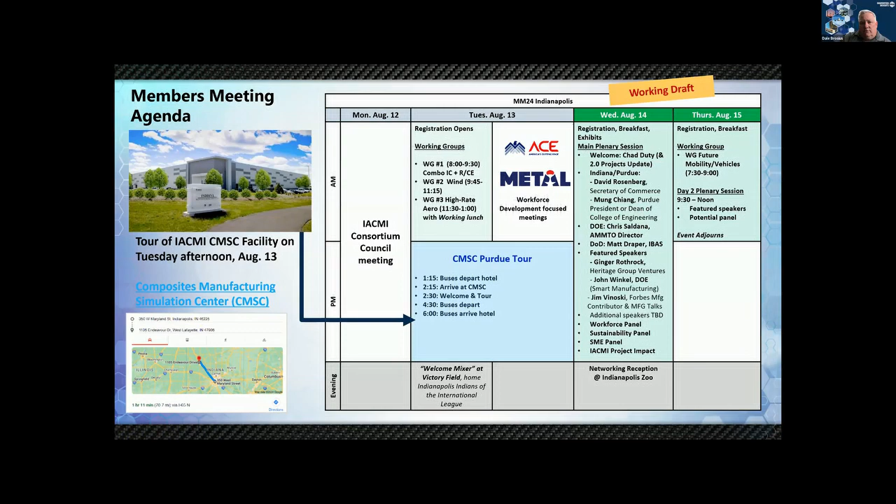On the first evening, Tuesday evening, we're having a welcome mixer at Victory Field, home of the Indianapolis Indians, the AAA farm club of the Pittsburgh Pirates. It's a great stadium, great view, and it's a block or so away from the hotel. If you're coming, you're invited, and you can register on the website for that.

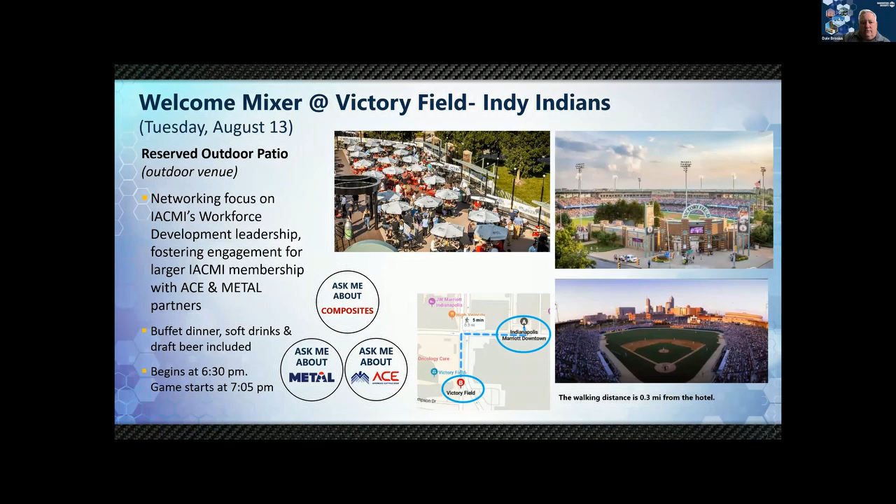And then our big networking reception on Wednesday night is at the Indianapolis Zoo. It's a little bit different venue than we've done before, but I think it'll be quite exciting.

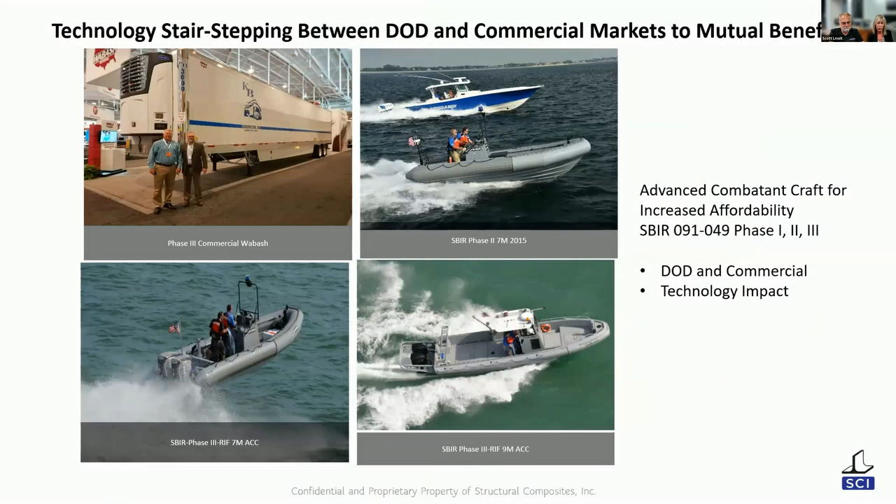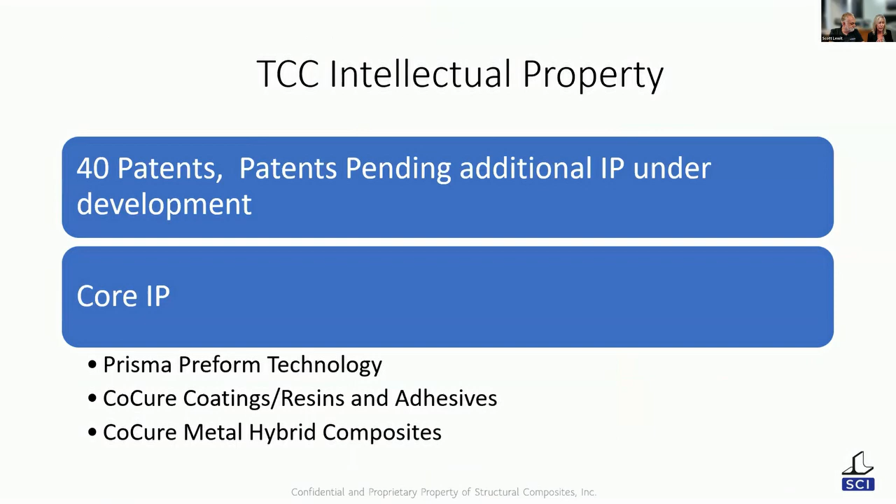If you go to the next slide, other work was done as a spinoff, and we're really going to get into showing the technologies that were discovered with our Prisma Preform technology, our co-cure coatings, and metal hybrid composites. Again, just highlighting that he's got 40 patents in his portfolio, and these are the areas we're going to go into a deep dive on.

Next slide. Scott: Yeah, okay, so one of the things we figured out a long time ago is that depending on the market you're in, a lot of times we're all trying to solve the same problem. What we've been able to successfully do is take technology originally geared to the Navy and morph it into the marine market, as Navy boats. So that's an easy morph.

If we look at transportation, where Wabash lives, it's really low, 3.6%. Why isn't it being used more? Well, the materials don't perform good enough, and they just cost way too much. The other market, infrastructure and building construction, shows a very parallel thing: 4% penetration in the construction market, same kind of performance and price gap.

What's interesting is now let's look at the scale of the markets, and that really tells the story. Material usage back then, 2012, was about $500 million in the marine market in composites. The transportation market at 3.6% is already over five times that size, and the construction market at 4% is like seven times that size.

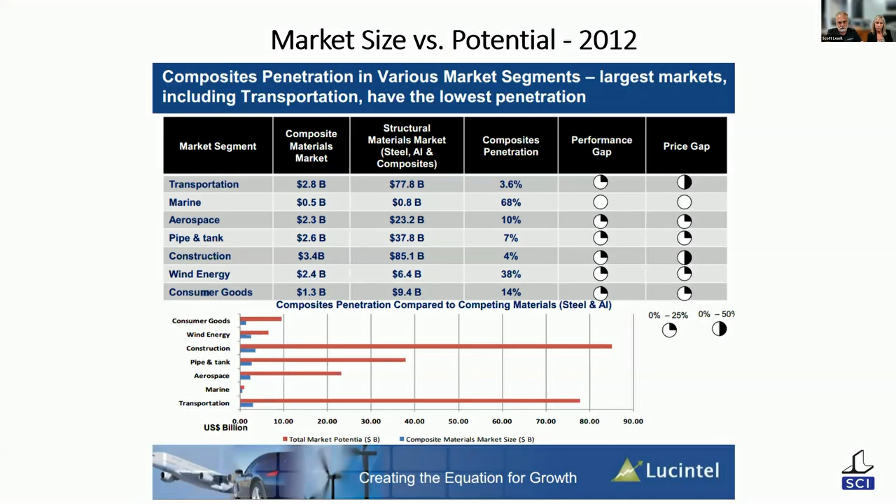That's kind of what our mission is here - to try to make the marine composites better, defense composites better, and simultaneously move these technologies with scale-up partners into other markets. So we use our scale-up partners to really drive our technology to deployment, and we stay focused on developing new technology. The core feeder that Joni talked about is Prisma.

Prisma is a pretty mature technology. We came up with that in the mid-90s, and we're kind of the guys that took the wood out of boats - a very successful product. It's evolving today now that the industry is really transitioning more to infusion processes. We've developed whole new lines of Prisma that have given this a whole new shot in the boating industry.

We estimate we're in about 20% of the recreational boats produced in the US that use some form of Prisma. What we do is take reinforcing fabrics and cast them into shape with expanding foam. So here's your dry preform. They can be custom molded to shape, or they can come out of machines. This is our machine here, it runs at about 16 feet a minute.

Wabash has machines doing Prisma panels for the semi-trailers and everything else, running at similar speeds - pretty fast output, 16 to 30 feet per minute, making these commodity type preforms, which are really centered around e-glass fibers and 2-pound density polyurethane foam. So pretty lightweight materials, relatively low cost in the composites world.

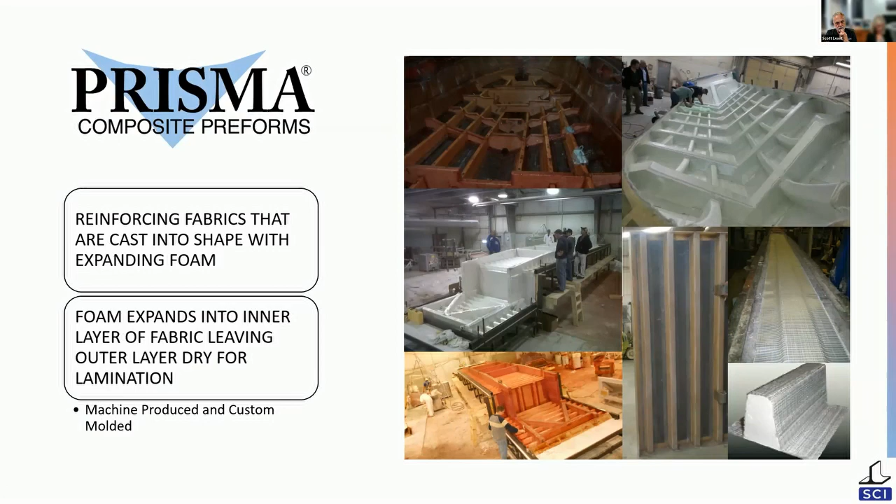By framing everything with this wrapped construction, we can make things that look like sandwiches, but they're not inside. They can perform better than sandwich constructions at a far lower cost. Because if you look at composites, it's cores that are the most expensive element, and if you can't tackle the core cost, you're going to have a tough time getting into these emerging markets. After the core, next comes the resin as your next cost item.

So we were able to take our technology - we had done some work in the RV market early on, which really helped. Our work in the bridge market, research work, helped too. So when Wabash came over here and started looking for their next technology, they could see the boats, but then they could see these other highly loaded structures, and they took the leap of faith, as you all know, that have worked with Wabash now.

We've been deployed since '16 - I think that was our first deployment. We're in our 11th year working with Wabash right now. It's an embedded customer model, so the Wabash research team lives right here in our factory, and we're innovating together.

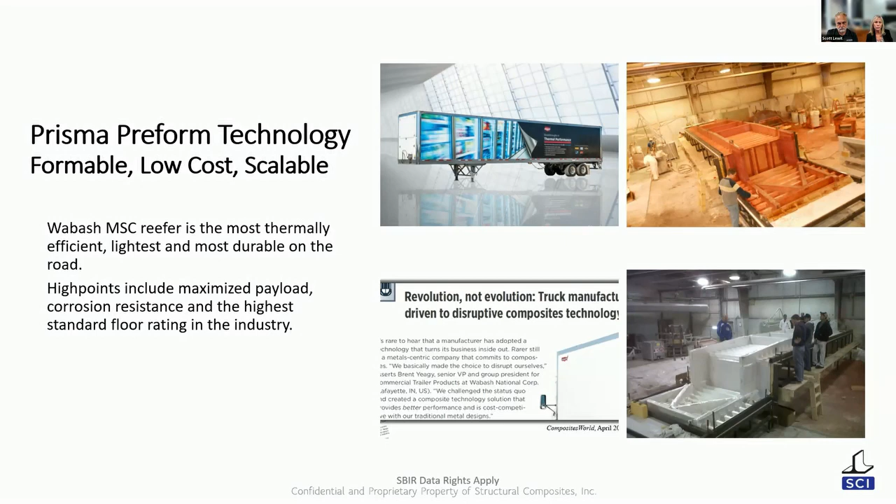So the preforms are really the low-cost framing element. After you've done that, the next cost item turns out to be resin. In our Navy SBIR, we're making shock mitigating boats. These boats have to absorb shock energy - we decouple the hull and deck, so there's a lot of motion. Gel coats just wouldn't make it.

That was the driver, to make tougher coatings. If you're in the marine market, you'll know that coatings are really problematic - about half of all warranty claims for boats surround gel coat, which is not a warranted item. So the builders really hate gel coat cracking. We overbuild our boats about 20% to prevent cracking. So there's a huge opportunity.

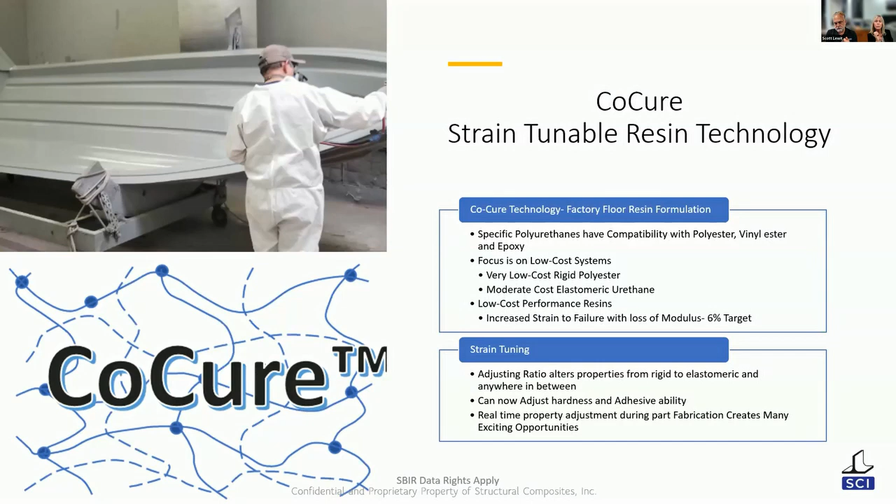Obviously at Wabash and Trinity, the extra 20% weight and cost is completely unacceptable - would never be able to meet our cost targets. So CoCure was a really enabling technology. When we first started, CoCure was a bit unique - I think it may still be the first commercially available property-adjustable resin coating and adhesive system.

What this technology does is a direct blend between your polyester chemistry and your polyurethane chemistry. We've developed compatible materials that can mix together at really different blend ratios with the same 4 chemicals, and you can get radically different outputs. So it comes together in a gun - here's an MVP gun that's got slave pumps on it for the urethane system. You've got your resin pump, catalyst pump.

And we can change the urethane constituents, and as we change that, we change our properties. So at first, we were really just focused on elongation. Polyester is great, it's low cost, but it's brittle. If we can get the brittle nature of it gone, we're counting on the fibers for strength, and we could have a resin that could perform very well.

And for coatings, same thing. We don't want our coatings cracking ahead of our laminate. And so our secret decoder ring is really simple here: this is the percent of urethane mixed into, in this case, a coating. So it's gel coat with its catalyst and then various amounts of urethane.

You can see nothing much happens till about 10%, then we start to shift. 15% is an economic sweet spot - that elongation matches our inexpensive resins on our boats. It gives us about double the impact resistance, double the color change resistance, double the weathering resistance, double the abrasion resistance. And that's a nice spot to be at, 15% urethane.

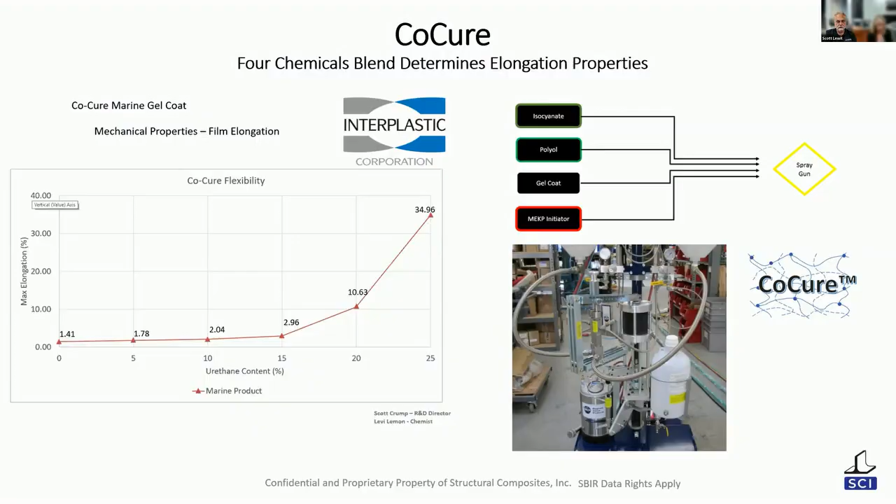And then you could get an idea of some of the property changes. Here we're looking at impact resistance, and this was a resin used for a container, not a Wabash project, another one. And you can see the regular resin, the impact zones here, and then as we increase the co-cure level, you can see the effect on impact.

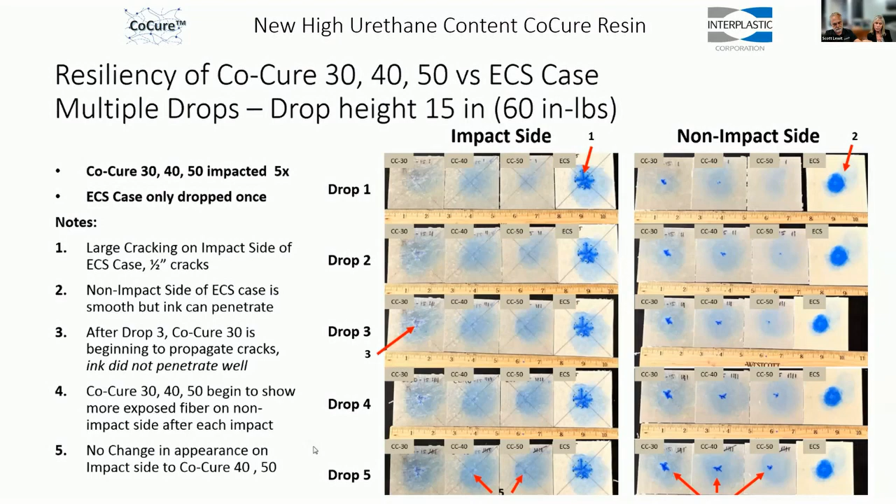Okay, so what's interesting about co-cure is you could change that blend ratio spatially over the part, and you can change it ply by ply or both. So the prospect of getting it onto a printhead where I can accurately dispense and meter and take advantage of all this property change is really exciting for us.

Okay, so at Wabash, this was a really important missing link. We were working on the trailers and we're moving from metals to composite, the low-cost composites fiberglass. It's great, it's tough, it's just not stiff. And there's a lot of stiffness required in the chassis and the floor of the trailer. As the forklift is running down the trailer, if it deflects too much, the forklift gets stuck. Okay, so we had to have a certain amount of rigidity.

And carbon will do it, but glass is $1.50 a pound. Carbon's 20, 25, $30 a pound. It just knocks our budget out. So the discovery we made with Wabash on metal co-cure hybrids really was a home run.

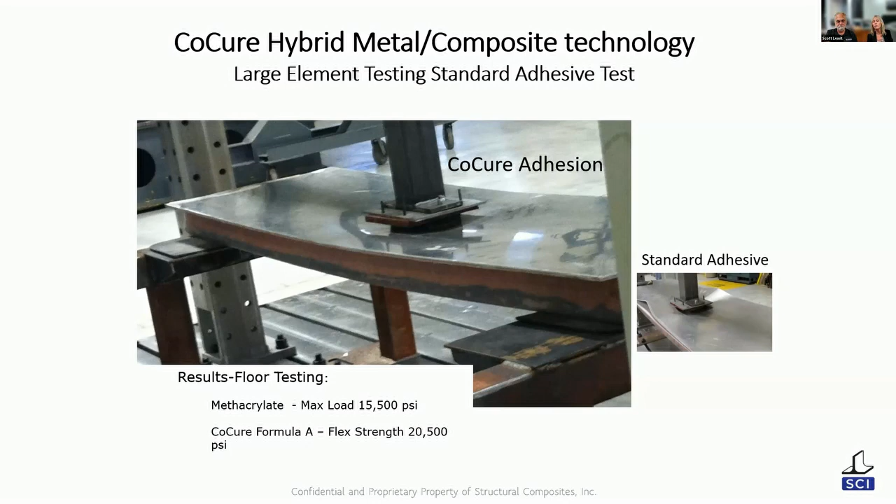So now what we're doing is we're marrying the composite to the metal. We're stealing properties like modulus out of that and really kind of coming up with a way to get traditional materials displaced, ironically, by using a bit of traditional material. And so it opens up this kind of new space of metal hybrids. There's been a little work done in the aerospace industry, GLARE, for example.

Most metal hybrids, you're bonding the metal to the composite. This is different - we're going to literally laminate the metal onto the composite. So what we're trying to do is now with this new toolkit, how can we start to blend metal and composites together? And what we're finding is you can do some really incredible things. It's really neat, these are two radically different materials. Also, when you look at technologies, people usually are on one side of the fence or the other.

The metal guys are trying to displace the composite guys, and structural composites. We're trying to displace metals. And so this new space of collaborating with the metal people from a scientific point of view, a materials point of view, is really exciting. And it's wide open.

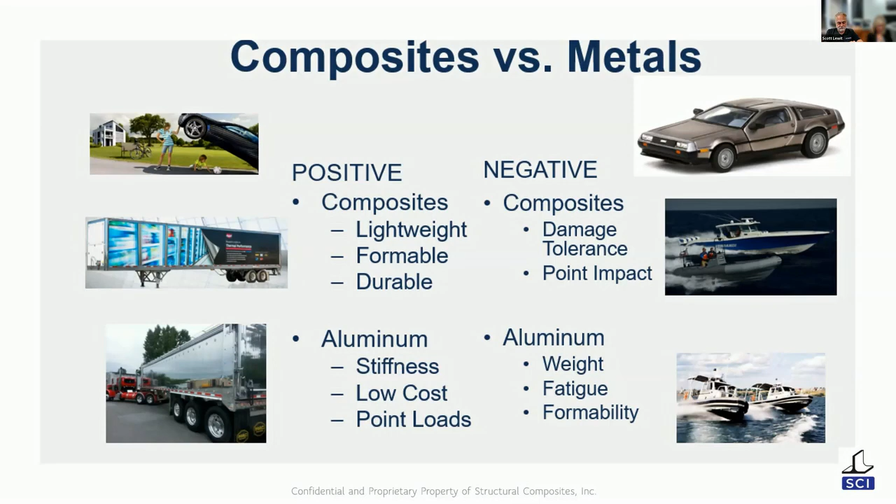There's a lot of opportunity. And it shows how radically different materials and mindsets, when you come together, things can happen. I use this with our politics - Republicans and Democrats are about as far apart. And if we can come together, think of the things we could do. And that's where metal hybrids come in.

So we came out in '16 with the first products. And these have now been field tested. The reefer units that are running these run on diesel. They're seeing about half the hours of runtime compared to conventional vans.

About a year ago, Wabash discontinued all the conventional cold chain, only doing composites. And they've expanded all the way down into final mile delivery. If you've got Kroger delivery vehicles running around near you, like we do down in Florida, those are all coming out of the plant up in Little Falls.

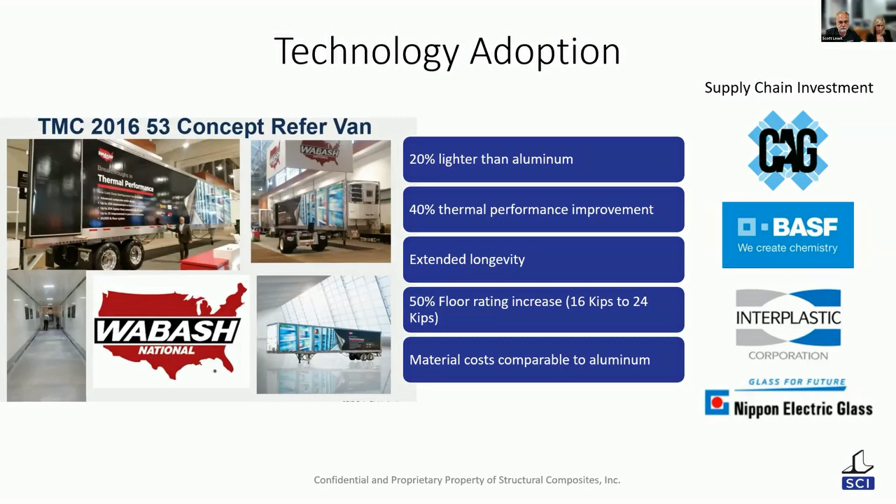Notably, they bought the Larson Boat Factory up in Little Falls. So they got a 53-acre, 550,000 square foot complex up there with a really good trained workforce.

Our model is collaboration. We have a collaboration model, and at the highest levels, we offer exclusivity to certain customers. So Wabash is an exclusive equity customer of SCI. So is Trinity Rail. And when you come in, you get all of the IP.

So we're able now to take the IP from Wabash, bring Trinity in, and pretty rapidly adapt our floor technology to a rail car. And so now you can kind of see that framed construction under there, the Prisma framing inside. And this is a 72-foot rail car - home run, just a home run.

We took 4,500 pounds out. We increased cube space. We actually are lower cost than steel. So it's just a total home run. That won the CAMX award in 2021.

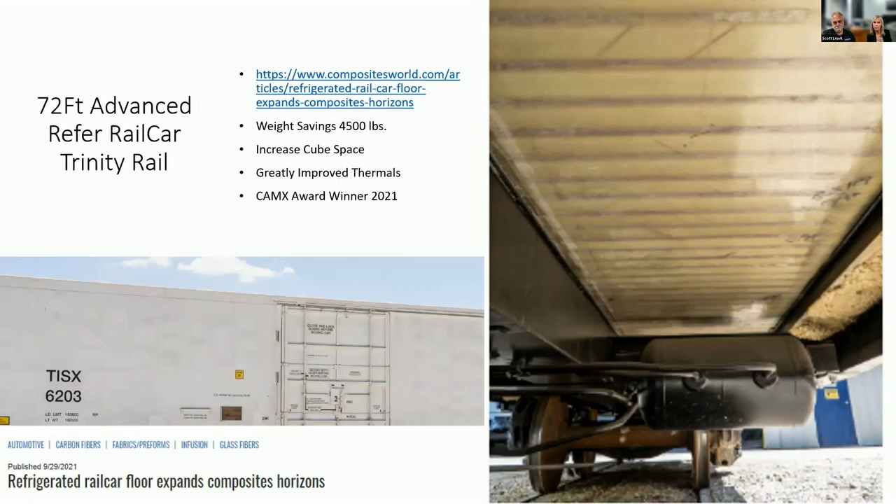That deck is CoCure formulated as a wear surface for roads with rocks in it. And that actually passed the DOT wear test. So that bridge is now coming on year 3. And we're hoping to get a couple more done in Tennessee soon.

So it's pretty exciting. Of interest on this is we're going after highway bridge decks. And we did this deck as a demonstrator. So we have an on-ramp, an off-ramp, and a joint, thinking, okay, that'll demonstrate highway decks.

What we discovered is there's a tremendous need for these little rural bridges. And the deck went on in like literally about an hour and a half. The rest of it was made conventionally and took too long, all the conventional concrete.

So we're working with the team at IACMI at UTK to see if we can, especially with that additive manufacturing, find a way we could do all this stuff so we can come on site and maybe do a bridge in a day or two, the entire bridge. But the deck shows you the potential for that, and that there's tons of small communities that are in desperate need for this kind of technology.

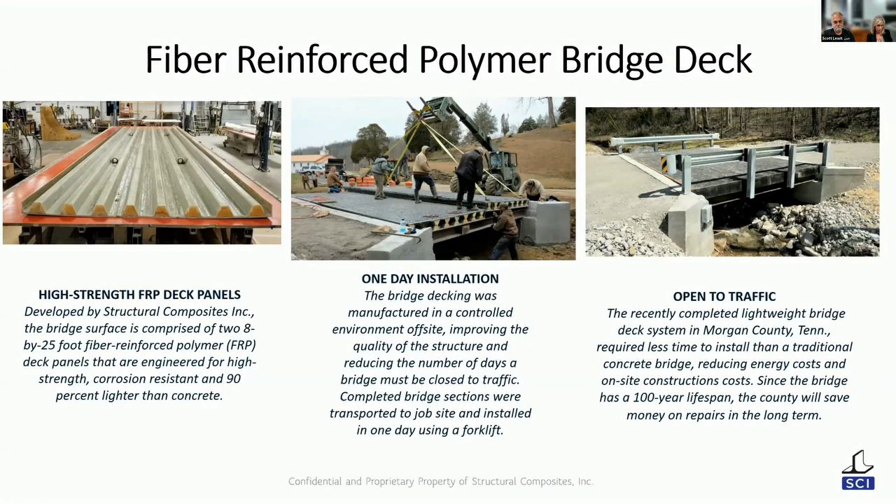Okay, and then a little bit on our training. So we've been working with Florida Tech - we're a spinoff of Florida Tech. And one of our interns has a real passion for workforce training, Dominique Gentili. I think some of you might have met her. And she took our intern program and really amped it up and turned it into a formal program.

Last year we're 85 people. We had 16 interns last summer, 14 the year before, and they did wonderful things and really helped the company. We got patents and led to us winning a pretty significant grant I'll talk about here.

And it's really important because these workers are really going into the market. So I think 4 of the Wabash hires are coming out of our intern program. Our customers are starting to hire these guys - they already know everything.

We intern a lot more students than we can hire. So for everyone in the audience, if you're looking for quality interns or hires that know composites, we've got quite a source here down at Structural Composites.

The state caught on to our program and encouraged us to write a pre-apprenticeship program. They wanted to see us drive the technology out of college more into the workforce. So Dominique and four of the interns in that first year wrote the proposal, and we won a $1.1 million grant to develop the advanced manufacturing pre-apprenticeship program. We made this for what we need.

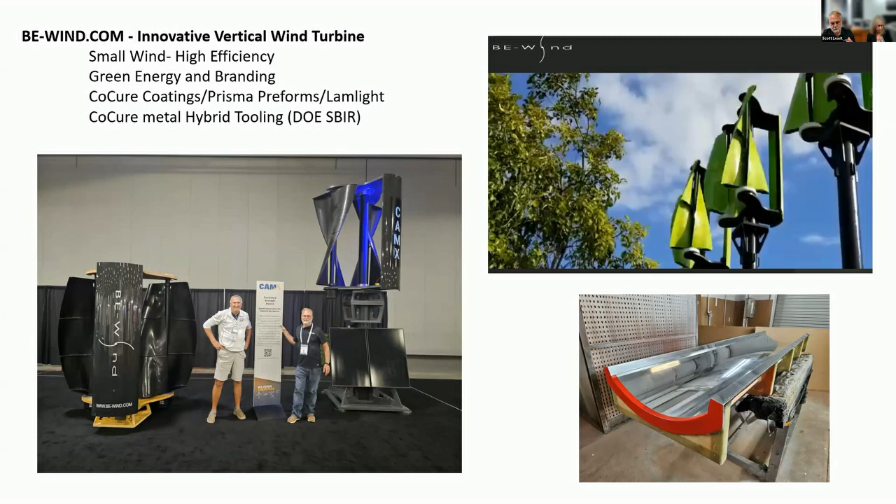So that covers the company and what we're doing. I know it's a lot, quick. Hopefully you've got some questions, but we're happy to take any questions. I will say that we have a passion for what we do here. We love what we do. It's taken 30 years to figure out where we want to go, and we know what we are now.

So we like developing technology. We'd like to have our collaboration partners. We're really collaborators at heart, and we collaborate with big companies, small companies, and hopefully we can collaborate with you also.

Thanks, Scott. Thanks, Joni. I'll give time for people to put some questions up, but one I've got is, this thing all started with an SBIR project with the military to develop the CoCure. Where did that eventually go on the DoD side? It came back, you had to come back around to it, I think, right?

Yeah, sure. So just a point, Dale, the company actually started in '87 with an SBIR from the Navy on fire performance. Okay, so that's way back. All right.

But in 2009, we won the one for the lightweight combatant craft, which led to CoCure. So now in 2012, I had figured out CoCure mixing, homebrew style. And I went to the chemical companies with this invention.

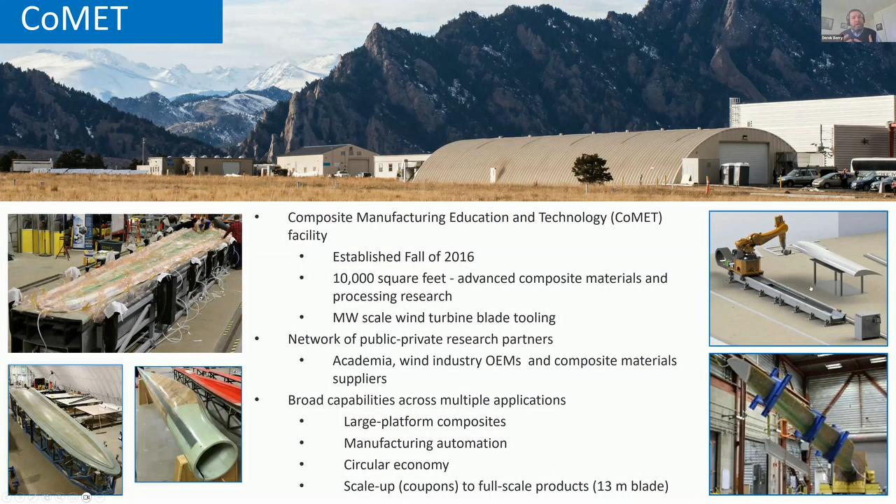The global wind industry and its supply chain are really, really important to the CoMET facility. You can see on the screen some of the capabilities and research projects we've engaged in from our founding in 2016 through today.

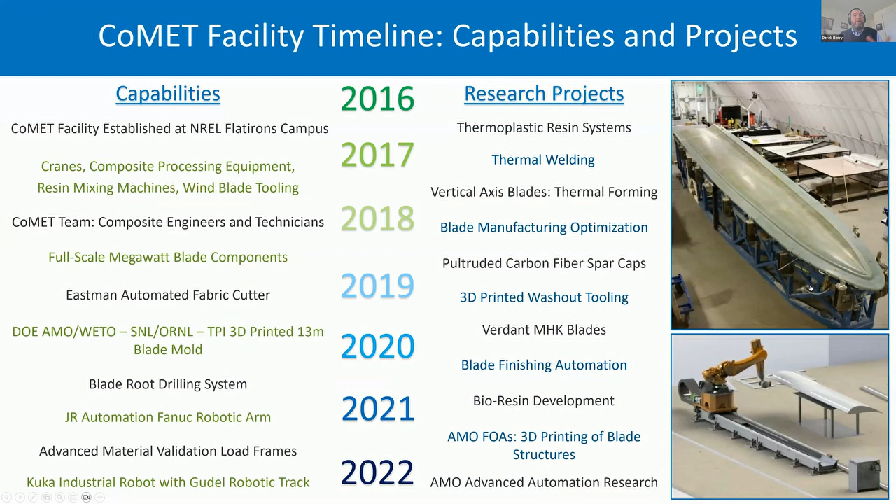I have data through 2022 there, but we've expanded a little bit more. We're constrained by space, especially overhead space, and we're looking to move into a new facility on NREL, but that takes some time with DOE. So the inside of CoMET functions in many ways like a wind blade manufacturing facility—not nearly as big, but it doubles as other capabilities.

You see in the top picture that we have a tour going on at the same time we're doing research with our core partners. So we have tours and visits from partners working on research projects with us. We have different types of research, from small scale to large scale, going on there all the time. We focus mostly on wind turbine blades, and some other structures I'll get into, but a lot of that is in the form of infusion composites.

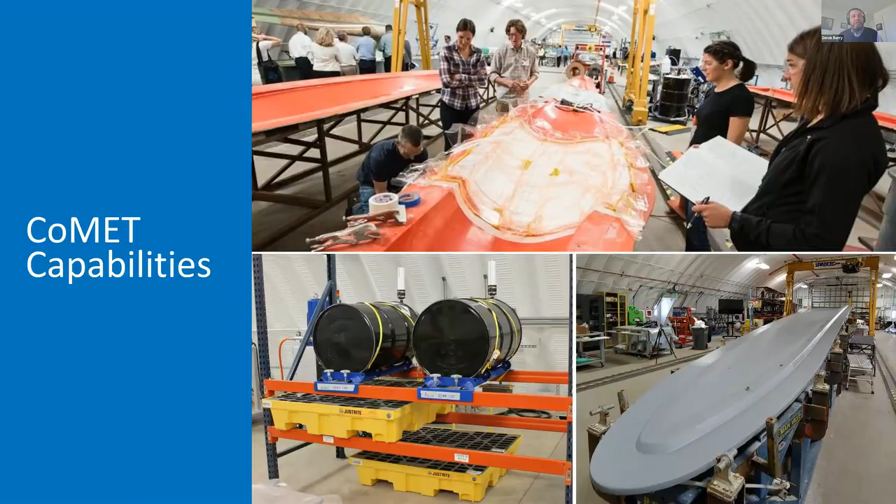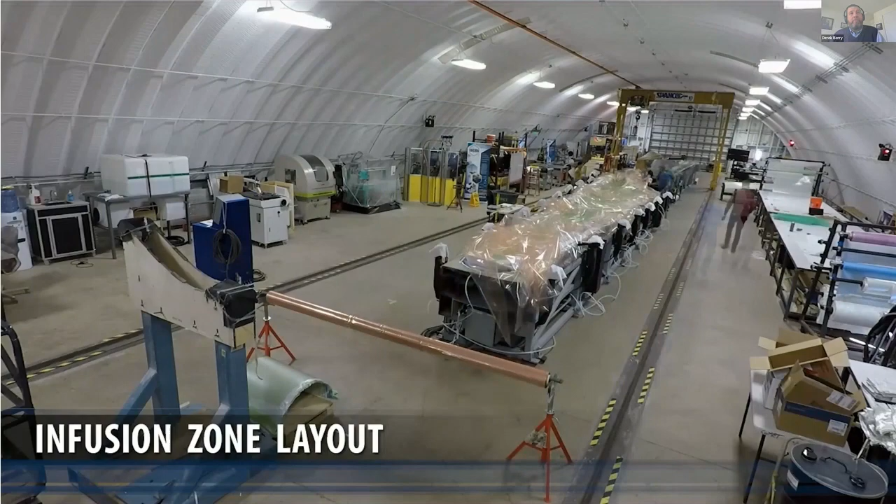This video gives you an idea of some of the research we do. This is a 13-meter blade mold, and we're performing the layup and infusion of two skins—a high pressure and low pressure skin—and also the shear web. Then we assemble the blade here, and it can go on to our test stand.

We have full validation capabilities, which I'll get to at the end of this presentation. That's generally what you'll see in the COMET, but it can be this scale or smaller scale as well. So just to give you an introduction to COMET itself, I'm going to move on to the next slide.

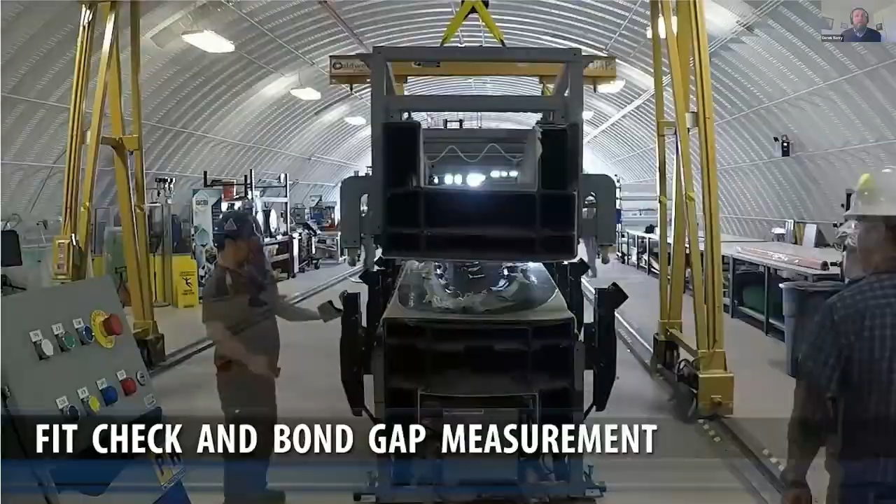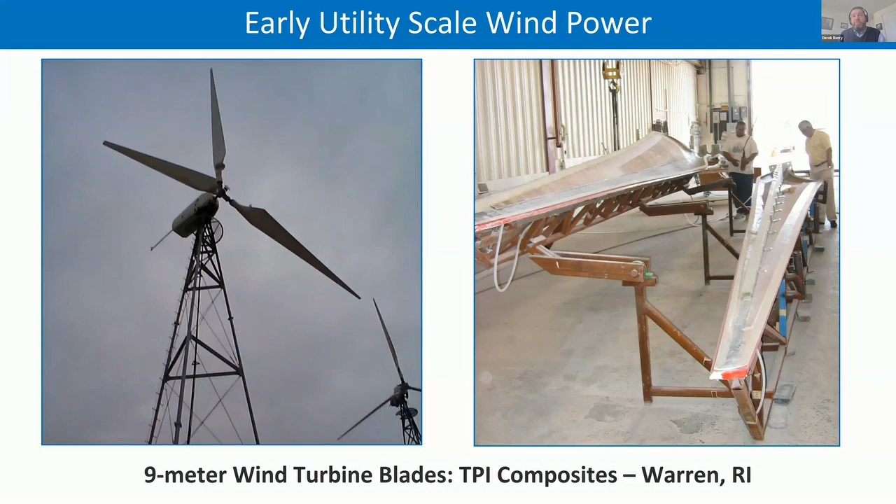What I want to do is talk about how this applies to the wind industry and the growth of wind turbine blades. When I got into the wind industry in '95, we were producing thousands and thousands of 9-meter blades at TPI Composites, where I worked for about 15 years. You can see Steve Nolette in one of the pictures as we're producing these 9-meter blades—a pretty primitive approach to it all. And even back then, we were looking at scaling up.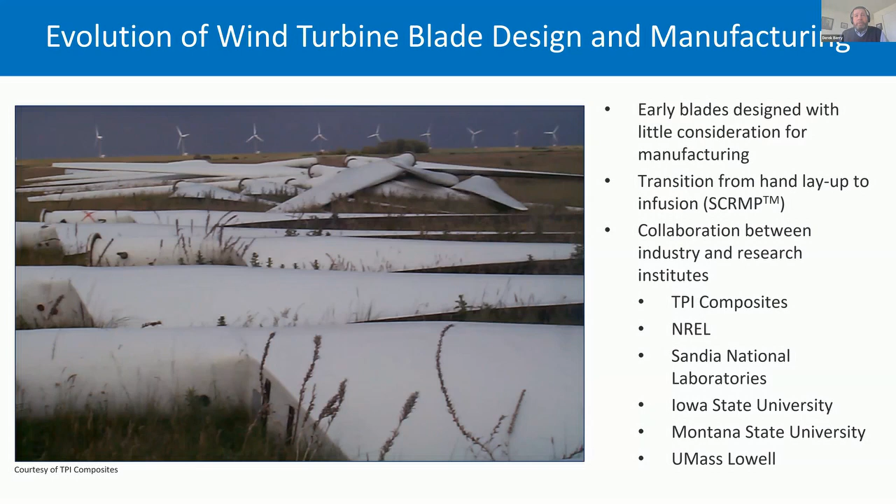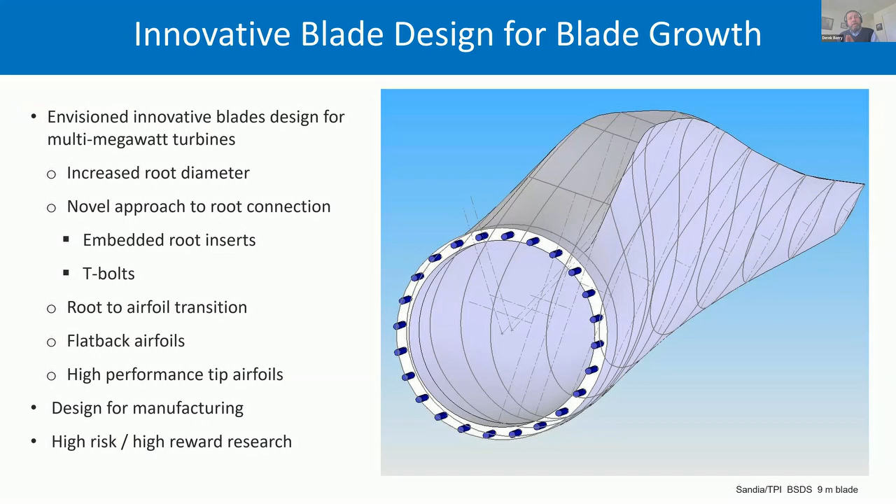That would get to some of the sustainability research we're doing, which I'll talk about later. Recycling would come along a little later, right around when IACMI was started in 2015, 2016. We were also looking at scaling up—what do those larger blades look like? So we started thinking about flatback airfoils, larger roots compared to the max chord, and things like that.

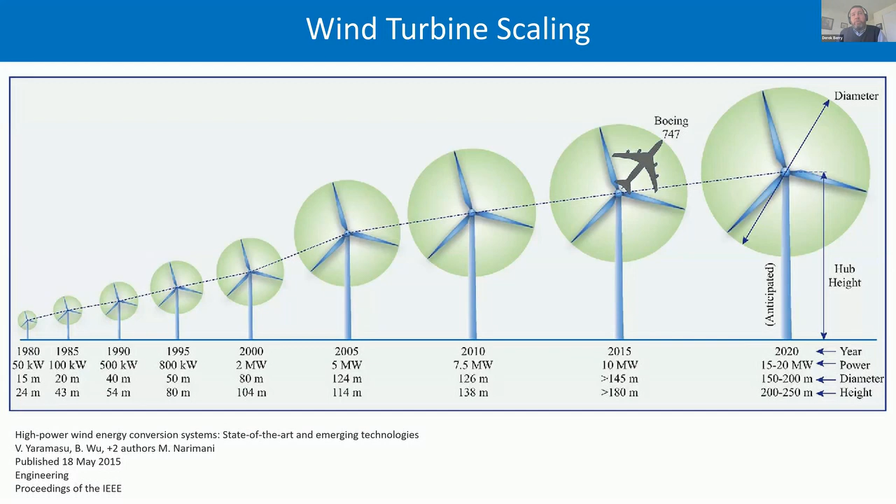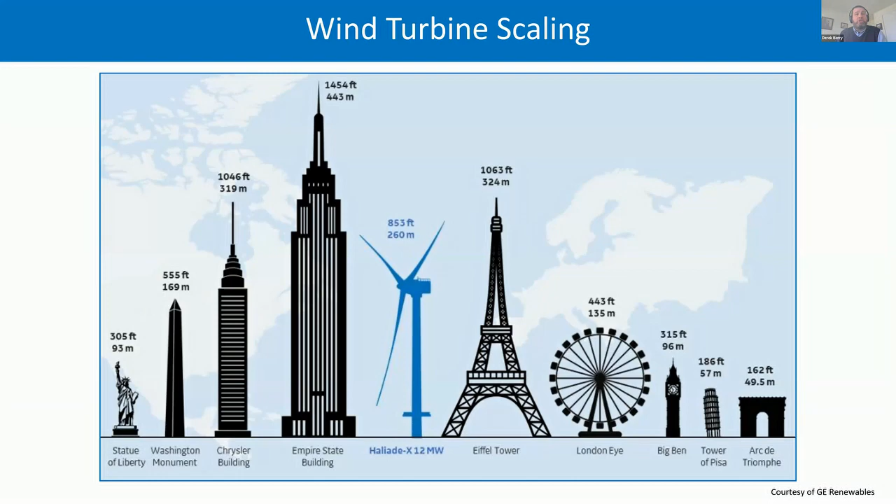Eventually these blades have grown, and many of you have seen charts like this—they're well over the size of a jumbo jet, a Boeing 747, and can fit not only the diameter of the swept area of the turbine but the blade size as well. This is a picture of what the GE Haliade-X 12 megawatt turbine would look like next to some of the largest structures in the world. These are pretty big wind turbines and wind turbine blades.

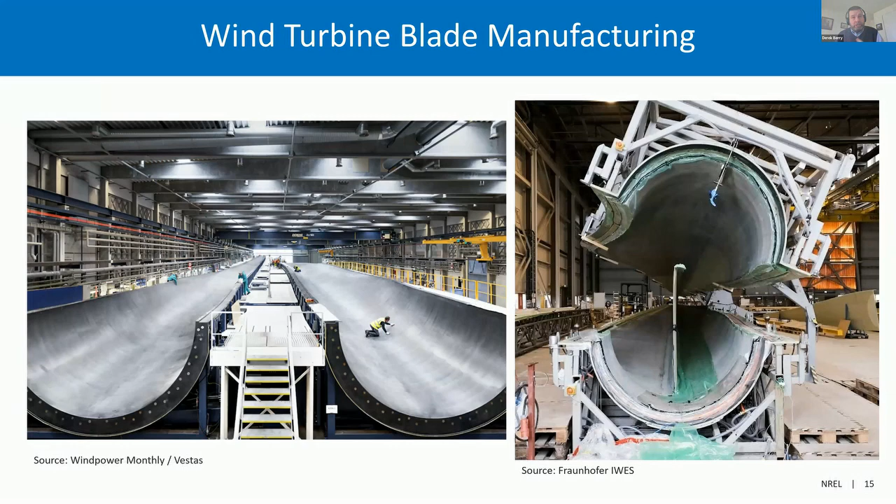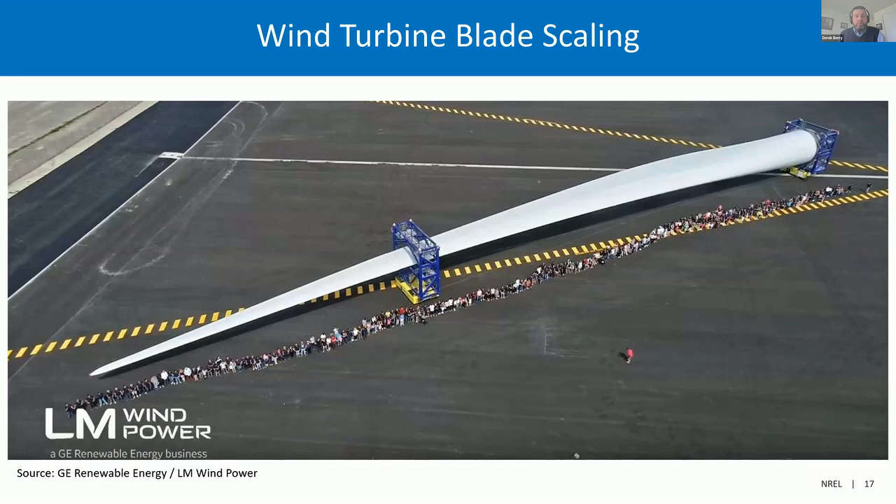Let me hop back into some of the research we've been performing at the CoMET facility with our partners through IACMI projects and some other non-IACMI projects as well. One of the major early research projects was looking at reversible thermoplastic resin systems for recyclable blades. In this case, we partnered with Arkema and their Ilium in-situ polymerized thermoplastic resin system.

What we want to do, however, is take the next step and get these onto a turbine for flight testing. We're looking for IACMI 2.0 opportunities, with a new turbine coming to NREL out here in Colorado at the end of this calendar year or beginning of next, to put three flight blades made out of Ilium resin, thermoplastic resin system, as the final test and get this commercialized in the wind industry. This has been a pretty successful project that we started very early on in IACMI, probably one of our first projects back in 2015, 2016.

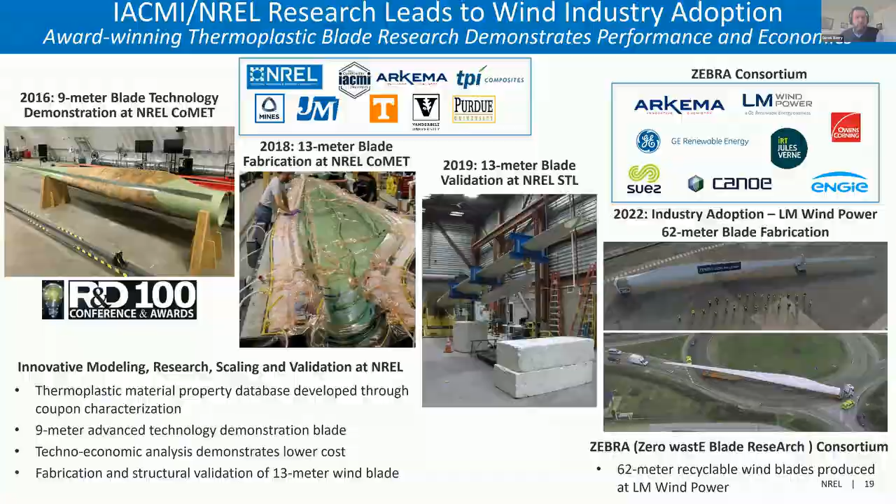We had some successful trials where, instead of using adhesive bonding paste, we used resistance welding and thermally welded different structures, high pressure and low pressure skins, together.

This has a lot of work still to go. We proved out some of the possibilities here, but to scale it up, to deal with the tolerances on a 100+ meter blade, to deal with the energy sources needed and things like that, a lot more work has to be done to commercialize this. But we did the basic research to understand it could be done on a fairly large scale, potentially down the road eliminating weight and the weak spots and field failures of adhesive bonding.

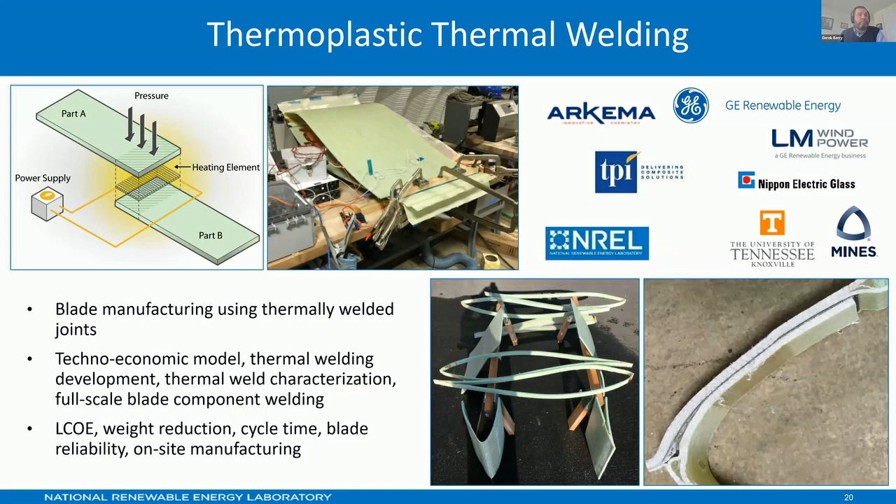I'll move on to something a little different. Blades have always used, for the past 10 years or so, spar caps that are pultruded, whether carbon fiber or glass fiber spar caps. When I got into the wind industry 30 years ago, we were using hand layup for unidirectional fiber, or pulling tows through wet baths and things like that.

But really, we revolutionized the way wind turbine blades were made, specifically the spar cap, by going to pultrusion. One of the things we did with IACMI and Oak Ridge National Laboratory, pultruding at Strongwell in Virginia, was to look at textile carbon fiber and reducing the cost of the carbon fiber input, with larger tows and material properties tailored to the stiffness that wind turbine blades require.

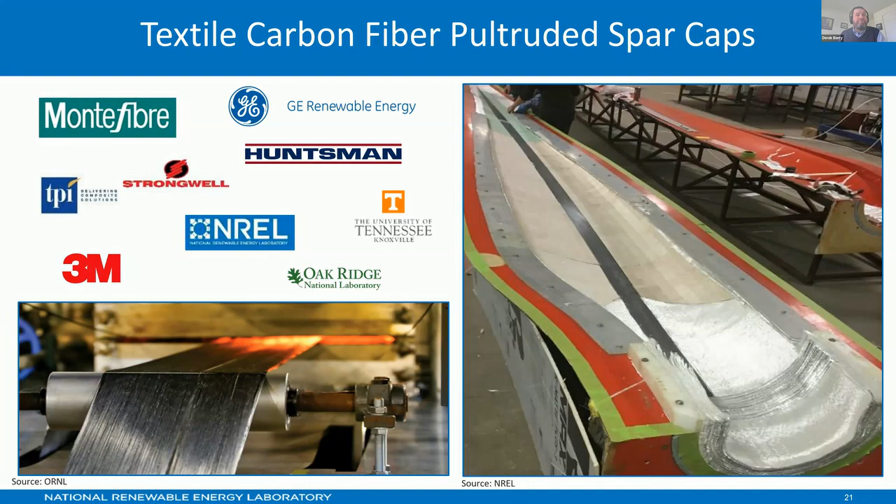I'll switch to another project, one of the later projects in IACMI 1.0. It was led by University of Massachusetts Lowell, UMass Lowell, and Steve Johnson there, to develop a techno-economic model, an Excel-based model that can help optimize wind turbine blade manufacturing.

This led to a really great working model. Steve Johnson developed the whole thing, and it can be used by industry today to model optimizations to blade manufacturing, materials and manufacturing, and to understand paths to commercialization for new innovation there as well.

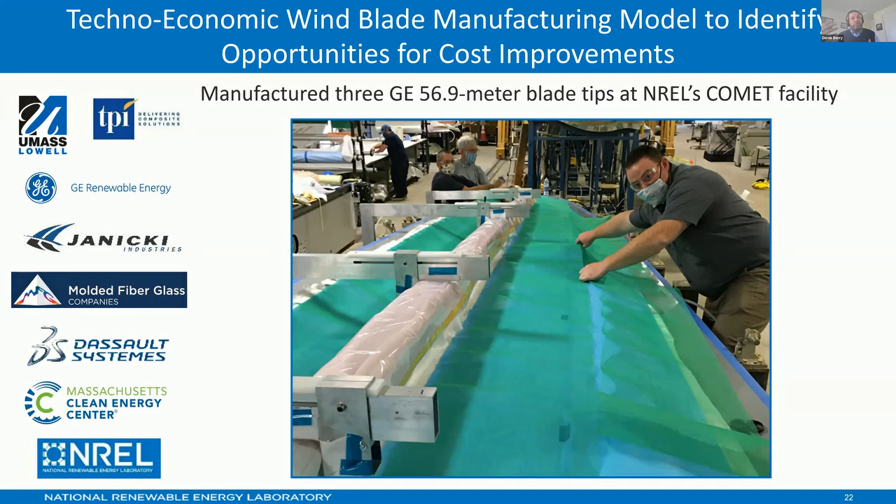I'll finish off with some of the work we've done in automation. We've had several IACMI projects, and then a follow-on project outside of IACMI. Right now, our very first project in IACMI 2.0 will pick up where we left off on our last automation project with LM and GE Vernova, looking at automated trimming, automated grinding, and automated sanding. We've made a lot of strides here.

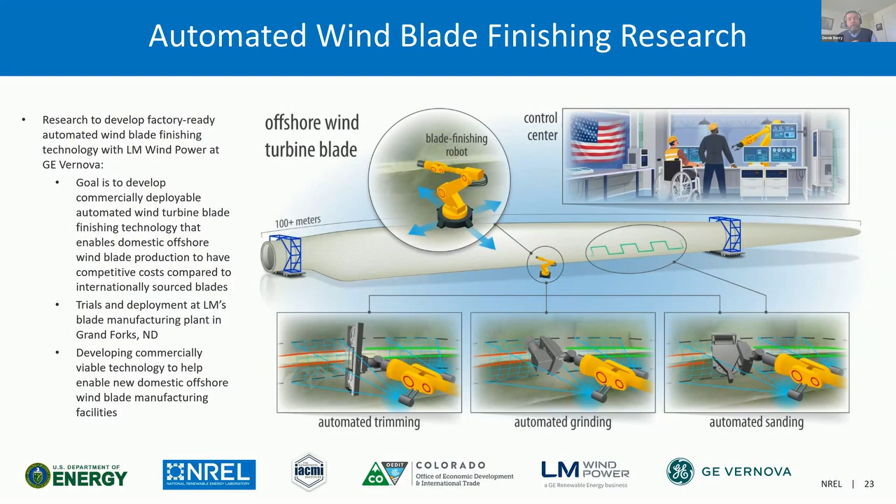I'll go to the next slide and look at some trials we've been doing recently with our robots in the COMET, using a section of a GE blade, an LM blade, that we took up to the LM North Dakota plant in Grand Forks, North Dakota, and trialed. As part of the IACMI 2.0 project we're starting, we'll be deploying this fully in the Grand Forks facility, and eventually, hopefully, around the world in many LM factories. This technology and others like it can be developed for the wind industry as a whole for different finishing processes, and maybe even molding processes.

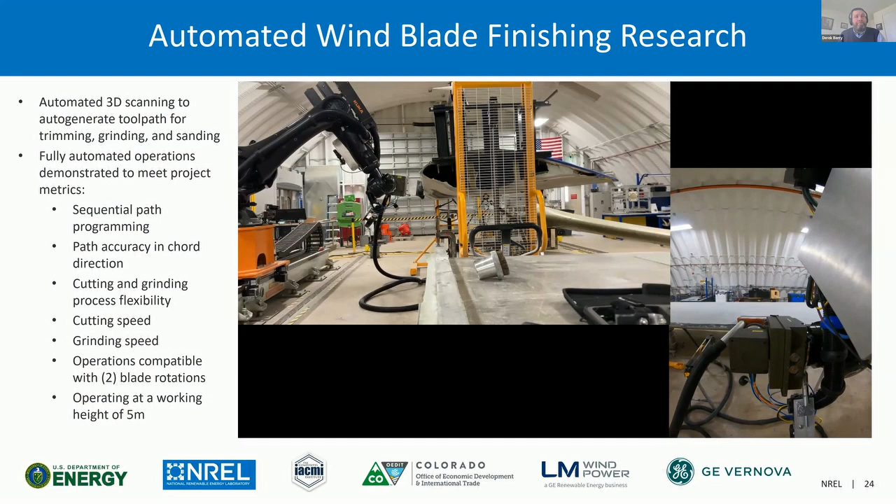I'll just finish off talking about some of the ongoing and other future wind blade research. I know I'm running out of time a little bit here.

We have a project outside of IACMI now, looking at wind turbine blade core, led by Andy Bridge and AES, TPI Composites, and Orion. IACMI is part of that.

Derek, you've got plenty of time. Don't feel rushed, great. Thank you so much. Yeah, thanks, Dale.

So we're working on that project right now, looking at 3D printing core for wind turbine blades that can be net shape of the blade itself, larger panels, reduce defects in the field, reduce cost, and look at supply chain issues as well.

We've also been working with others. Orbital Composites has been working on different additive manufacturing approaches, as well as a new company, Perseus Materials. Dan Lee and John Feist started that company, and they're also looking at unique ways to produce blades with additive manufacturing.

We've been working with Siemens Gamesa Renewable Energy on a future project for modular blades, and continuing to look at NDI, NDE, non-destructive evaluation, with Vestas, LM Wind Power, GE Vernova and other companies, to look at maybe automating some of the NDE that happens in a factory or out in the field.

With offshore wind coming online, there's an amazing amount of research that can be done for lightweighting up on top of the tower, especially as we move toward floating wind structures, and also for supply chain—reducing any hitches in the supply chain for wind turbine blades coming into this country, whether that means domestic manufacturing or mitigating supply chain difficulties from offshore.

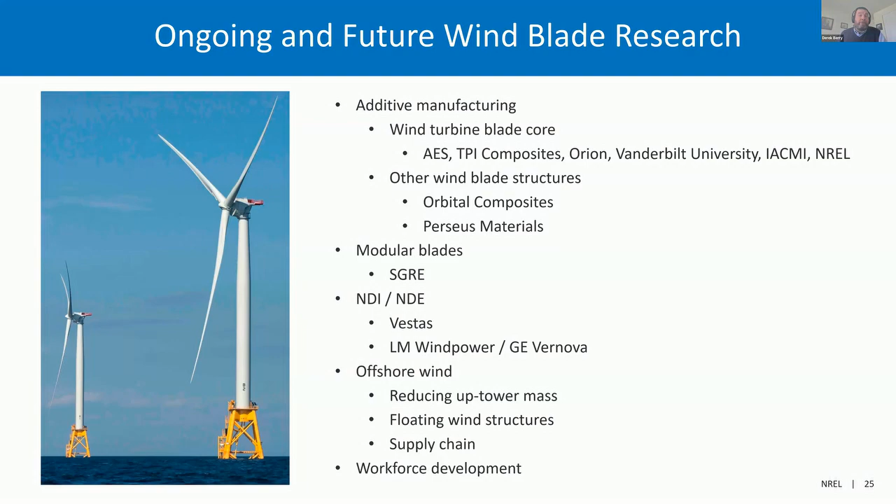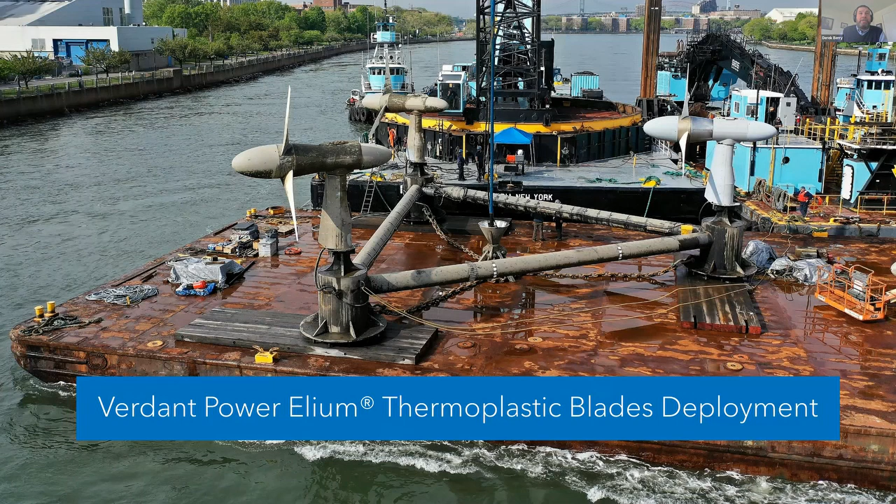I'm going to skip over to something that's not wind, just one picture here. We do a lot of other composite materials and manufacturing innovation at NREL, at the CoMET facility. This you see here is a Verdant Power project. We used the Elium thermoplastic resin system and deployed these tidal turbines in the East River in New York City for 6 months, then took them back to NREL and did a lot of post-operational testing to see how they fared in the ocean and salt water there.

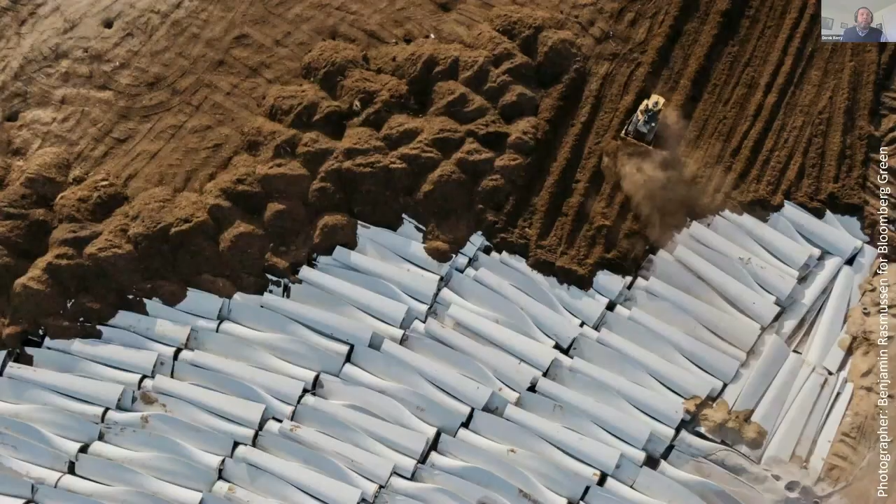I'll mention really quickly wind turbine blade sustainability. It really was something that was not on our list, not even a concern of ours for 20, 30, 40 years of wind, until about 2015. When we started with IACMI, we talked to every wind turbine OEM and blade manufacturer, and it has risen to the top of their list from the very bottom, or non-existent actually.

This picture, one of many from a Bloomberg article, now maybe about 4 years ago, kind of sparked the debate in the public about the sustainability of wind turbine blades, the circularity of the materials in blades and things like that. Most of the turbine is recyclable, very easily, the steel and other components, but the foundation, the blades, and the rare earth materials are of note as well.

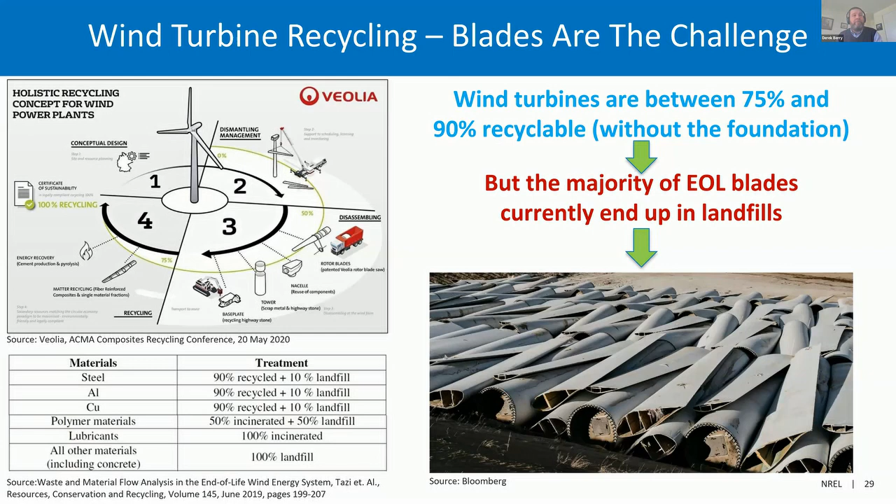Blades typically end up in landfills. So we have a dual issue to deal with here: the existing thermoset blades that were never designed for recycling, no thought given to them, and then also what do we do in developing blades of the future to design them for recyclability.

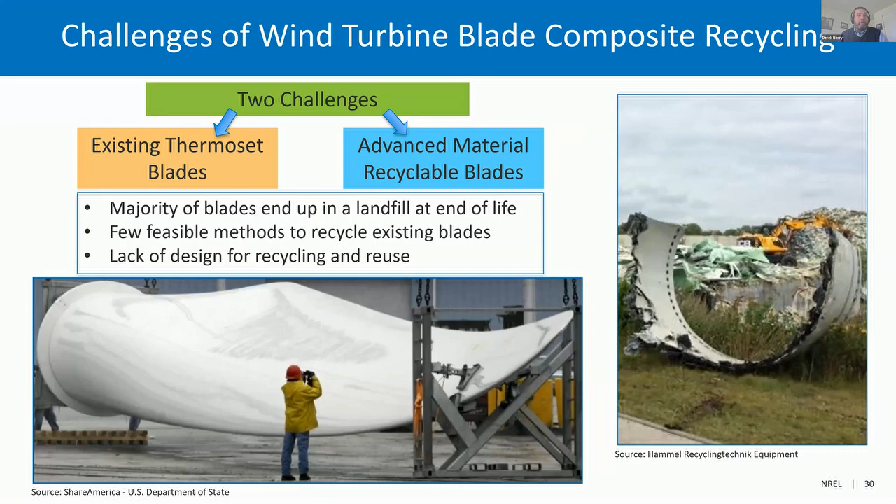You can see here some of the circular economy pathways for blades. We want to extend the lifetime of the blades, although it doesn't always work when we have a repowering—you're not extending the lifetime because you're putting longer blades on and taking shorter blades down, and you have to figure out what to do with those. But we can reuse those blades, repurpose them for different structures, and we're putting a lot of work into recycling blades that are coming off towers now.

The last thing we want to do with them is put them into a landfill. I have incineration in there as well, cement co-processing incineration, which is sort of a downcycling type activity. So that's kind of the hierarchy of what we're looking for.

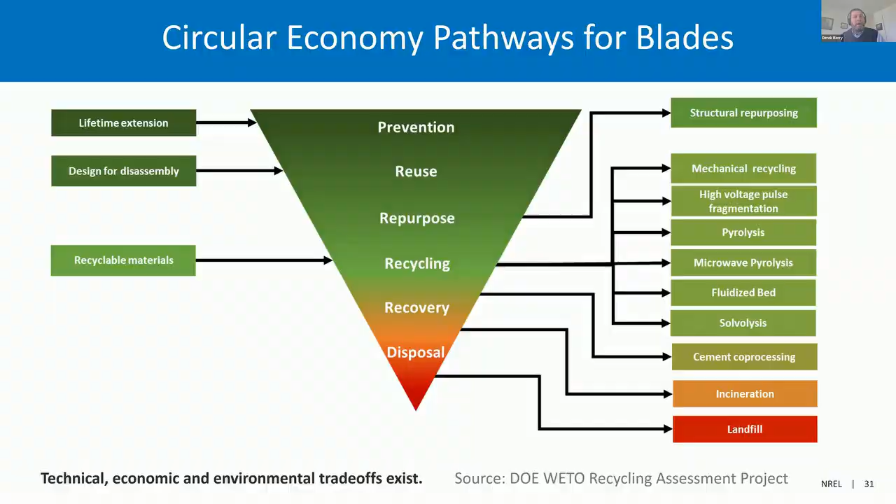We've also developed here at NREL a bio-based resin system called Pecan. Robynne Murray and Nic Rorrer and other chemists here at NREL are looking at new bio-based materials so that the carbon footprint of the materials we use to develop these resin systems is lower, while also being recyclable through reversible thermosets instead of reversible thermoplastics. The chemists are putting a cleavable link, I believe—I'm not a chemist—into the system in order to be able to reverse it at end of life.

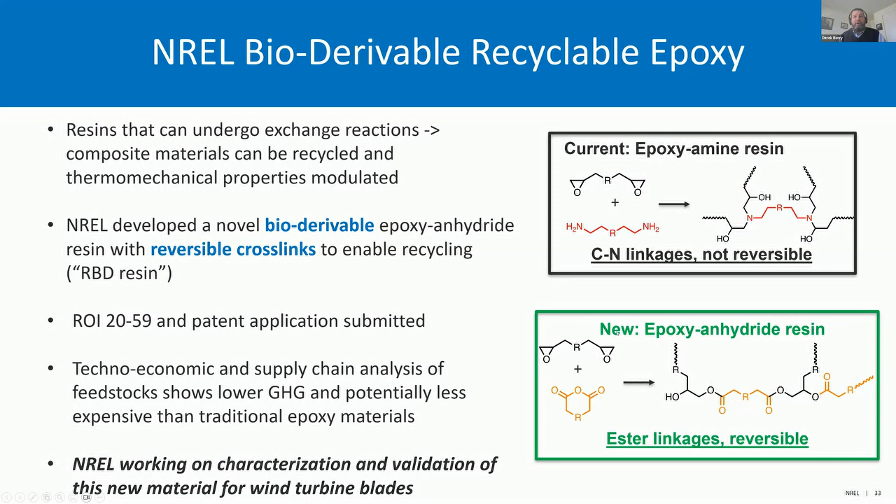Finally, I'll finish off with a couple of pictures of our full-scale wind turbine blade validation. This is actually a picture of how we used to test blades. It's not great, especially for the guy standing underneath the blade there with all the sandbags stacked on top. We've gotten safer and better at what we do.

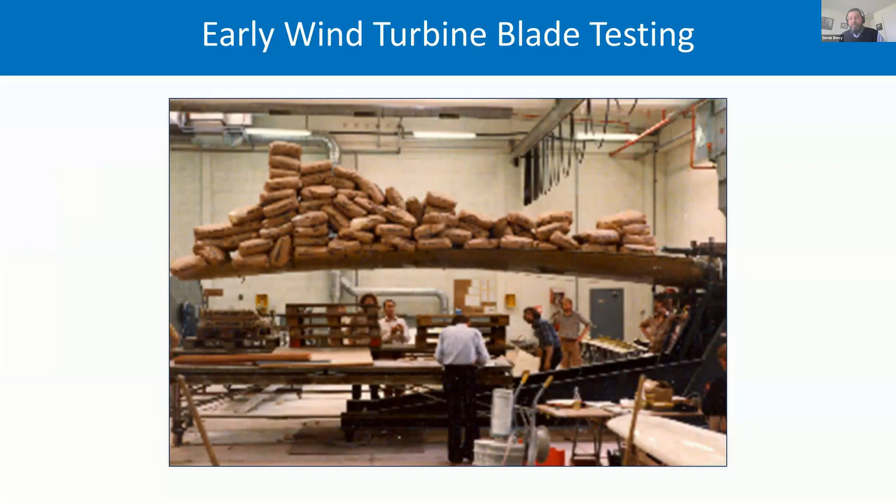Across the road from the CoMET, as I mentioned, at the NREL Flatirons campus is our Structural Test Laboratory, STL. You can see a setup there for the 13-meter blade going through a static test with what we call a wiffle tree, where we spread the load out between different saddles. We generally test in 4 directions: max flap, min flap, max edge, and min edge.

And then we move on to fatigue testing. You can see there we're using a resonant actuator moving at the resonant frequency of the blade itself in the flap-wise direction. We also switch that actuator around on top of the saddles in order to test this in the edgewise direction as well. This can be done at any scale, but for us, we can test up to about 30 to 40 meter blades in our test facility.

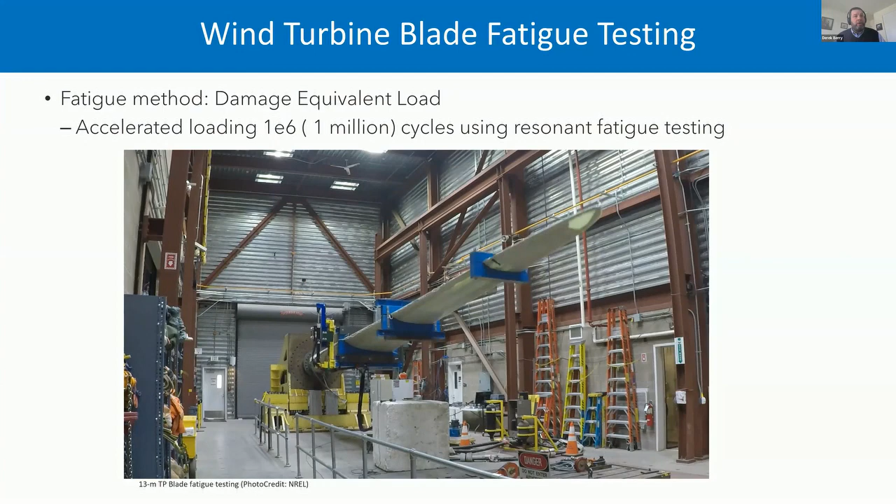We also partner. I helped design and build the WTTC in Boston, which can test up to about 100 meter blades there. They just put an extension on there, and I'll just run this video.

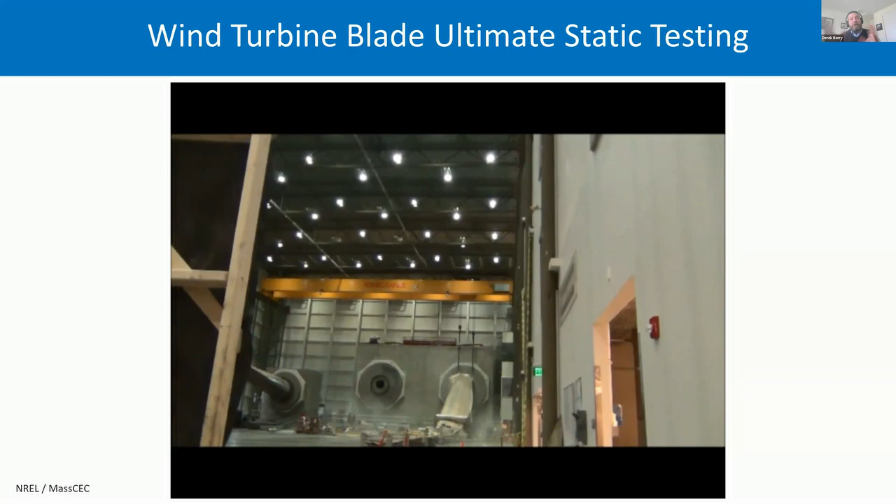You can see this is a static test of a blade, about a 50 meter blade here, that is about to break, and that's a pretty spectacular blade break. Oftentimes they just fold in half pretty unspectacularly, but it's a static test of failure to understand what kind of safety margins you have on the blade itself.

So that is the end of my presentation. I will stop sharing and look to answer any questions if there are some out there. Thanks for your time.

Great presentation, you covered the whole thing, soup to nuts. A lot of stuff. Yeah, we had one question come in: have you looked at urethane foam cores in the past for blades? Or what are the current foam cores, and have you looked at urethane?

Yeah, sure we have. So typically blade cores towards the root section, on the inboard section of the blade, are oftentimes balsa wood, contour cut balsa wood to go around the curves. That soaks up a lot of resin during the infusion process and becomes a little bit heavy, but that balsa core works pretty well, with good compression strength towards the root of the blade.

We have looked at urethane. We've used some PVC foams and other types of foam towards the tip of the blade. We've used some recyclable foams as well in the past during our research, but typically PVC foams are what we've used in wind turbine blades.

Dale, do you want to add anything to that? PET, right? Yeah, exactly. PET, particularly recyclable PET. Yeah, the recyclable PET, exactly.

So we have one question, and then we'll be at the hour. It would be: if you had to name one, two, or three top priorities for the wind industry that industry could bring forward solutions for, what would it be?